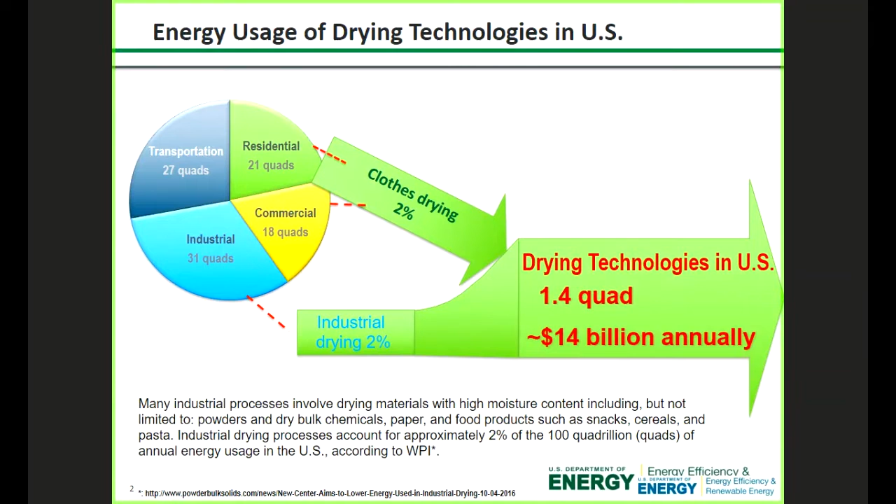Specifically on the clothes dryers, mainly because our project was focused on the clothes drying applications, but the IP that we developed can be applied on different drying technologies. Let's focus on the clothes drying in the residential buildings. Almost 85% of American homes have clothes dryers, and that accounts for 6% of the utility bills in residential buildings, and that's a large number.

Somewhere about $9 billion of energy bills goes just to the laundry or just to the clothes dryers, and that's a huge number. It's expected that the average sale of clothes dryers in the United States keeps growing with the rate of 1.8% in the next few years.

The conventional clothes dryers work based on the evaporation of water, or based on heating. What they do is that they take electricity from the wall outlet. They have a resistive heating element. As air passes across that resistive heating element, it heats up, and the hot air passes across wet fabric and evaporates water, and that's how they achieve drying.

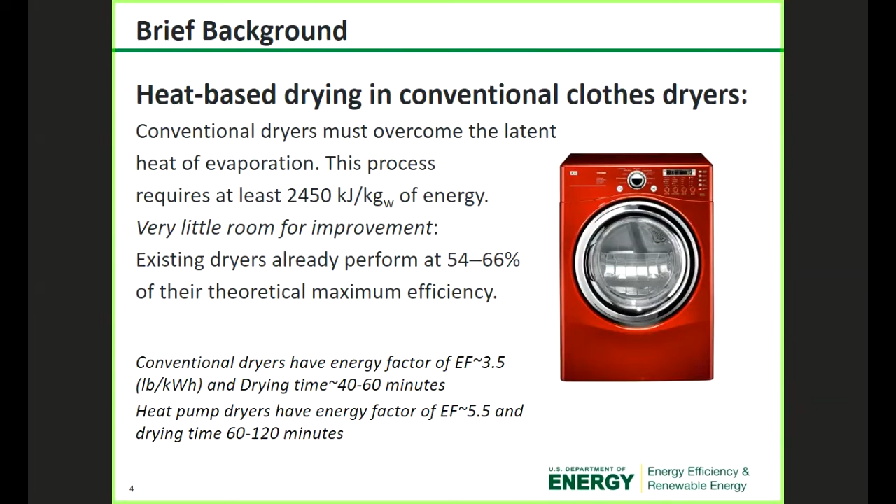So what we developed here, or what we proposed, was that conventional dryers use heat to evaporate water, and the latent heat of evaporation of water is so huge. So instead of doing that, we propose to use high frequency vibration to shake fabric at high frequency. And when you are shaking fabric at such a high frequency, actually moisture comes out of the fabric in the form of cold mist. So we are not evaporating water, we are just mechanically extracting the moisture from the fabric.

How we achieve high frequency vibration is using piezoelectric transducers. Also, some people call them ultrasonic transducers, and that's how we generate high frequency vibration.

Let's dive a little bit into the details. Let's say we have an oscillating system that has oscillation like A sin(ωt), where ω is the frequency of the oscillation. The driving force that tries to take the moisture out of the fabric is proportional to the mass of the droplets inside of the pores of the fabric times the acceleration that is induced by piezoelectric transducers.

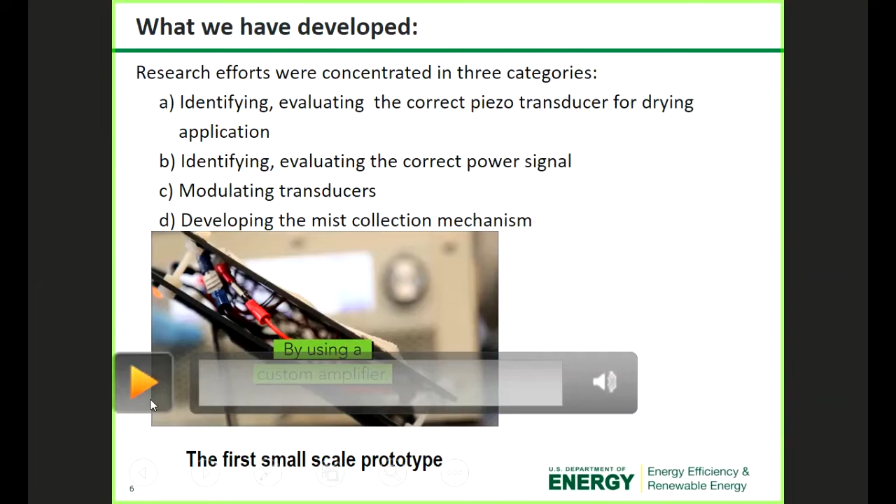So at the end of year one, this was a prototype that we had, which could dry 14 square inches of fabric. As you can see, the moisture could easily be removed from that wet fabric sitting on the piezoelectric transducers. The goal of the project at the end of year one was to dry at least 4 square inches of fabric in less than 20 minutes. What we achieved is that we could dry 14 square inches of fabric in 7.5 minutes. Also, we could modulate the system. The systems that you can see here consist of 24 transducers.

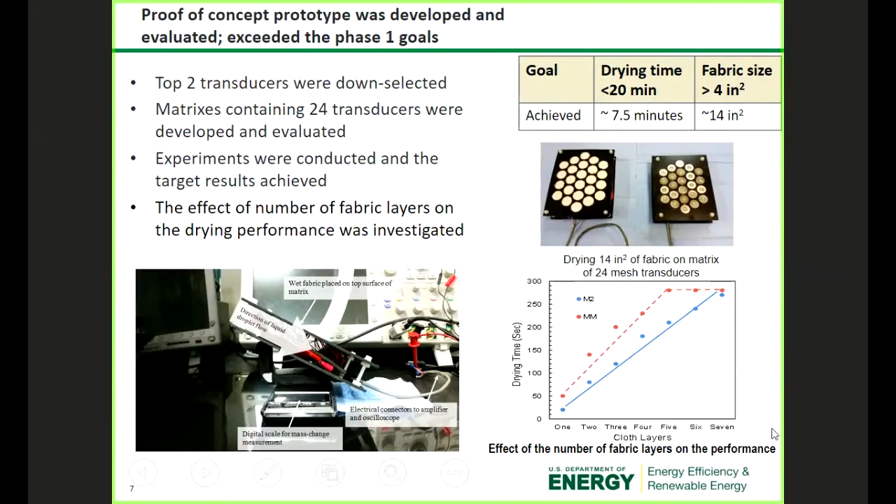We also did a study on the effect of the number of fabric layers. As you can see here, we showed that as you put several layers of fabric on top of these piezoelectric transducers, the drying time linearly increases as you put more and more layers. So after that point, something nice happened to the project. We developed a first order model for the system, and our model inspired a game-changing insight.

So during that time, which is in microseconds, we realized that we don't need to power the piezoelectric transducers. It's not necessary because they are not coupled together. So what we came up with from this analysis was: why not drive these piezoelectric transducers at a much lower duty cycle and save a lot of energy?

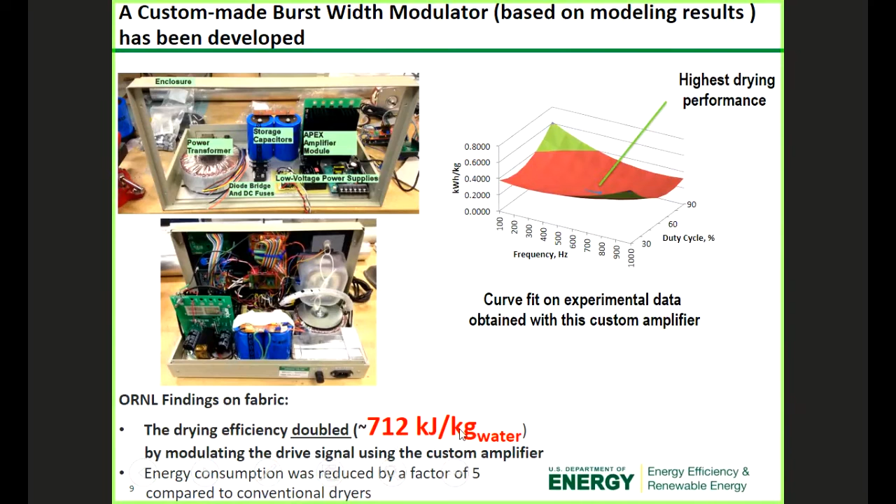We did that. In order to do that, we had to design our custom amplifier, and by doing it, we could double the efficiency of the drying and achieve drying performance as low as 712 kilojoules per kilogram of water removed. Putting it in perspective, this is about 5 times more efficient than if you wanted to evaporate water.

Another question was that this technology generates a lot of mist; it mechanically extracts the water in the form of cold mist. What can be done with that cold mist? So in a part of this research, we focused on how we can design a mist collection mechanism, and we realized that by putting a few layers of typical lint filter and passing the mist across that, we can collect the water, and the water can be drained easily. That's one way.

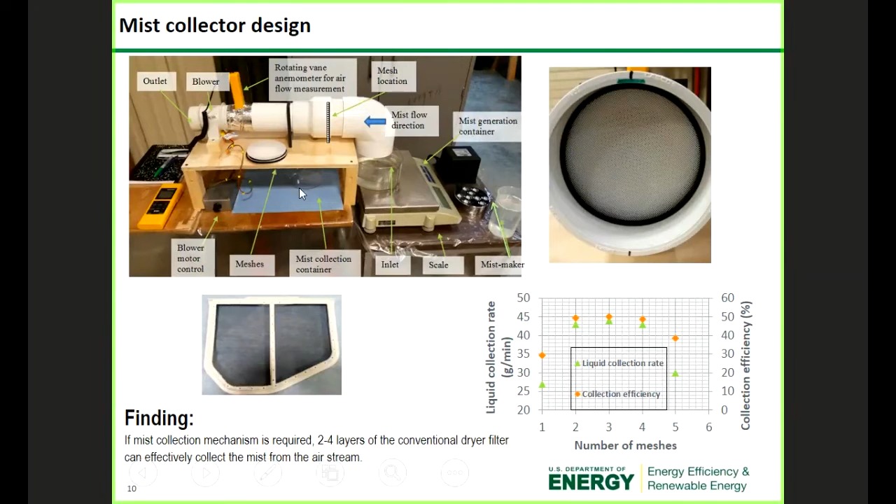Or if there is any venting system available, you can just simply vent it out. So in either case, the final design of the clothes dryer can be either a vented dryer, or the water can be collected inside of the dryer machine itself. So there are a lot of flexibilities in this area as well.

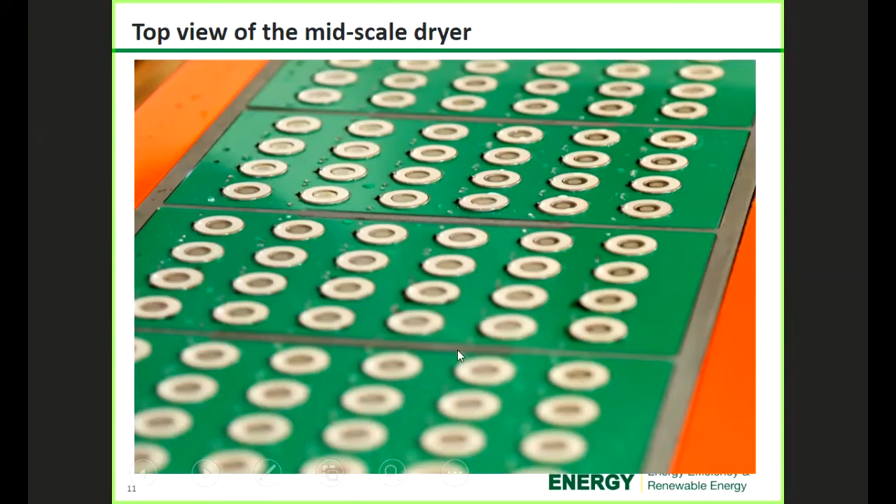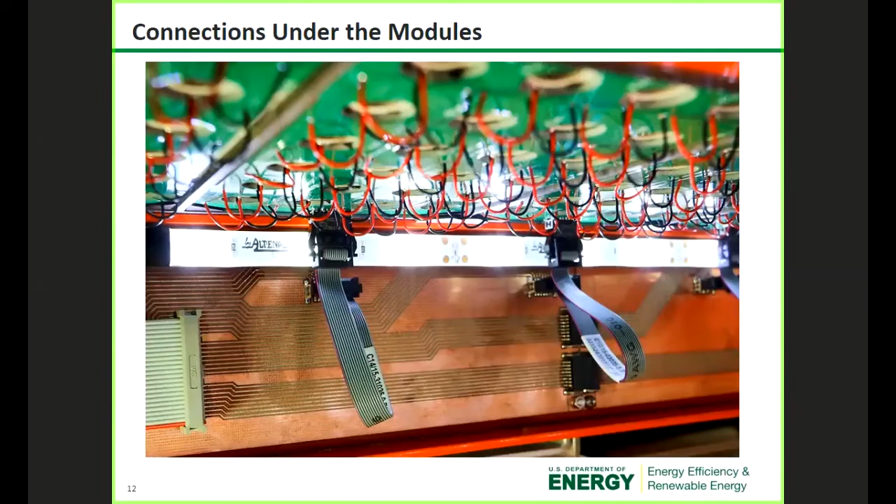And this is the prototype, the latest prototype in action, and I'm gonna run the video for you. So what you are seeing here is that we put a wet fabric on top of the piezoelectric modules we had. You could close the lid or not, it doesn't matter. And as we were increasing the voltage or amplitude of the vibration, you can see a lot of cold mist is coming out of that wet fabric.

The interesting thing in this technology is that this cold mist is not warm at all. It is just as cold as room temperature, and that's why we could reach such a high drying efficiency. So this process goes on for somewhere about 4 or 5 minutes, and we could reach complete drying in 4 or 5 minutes.

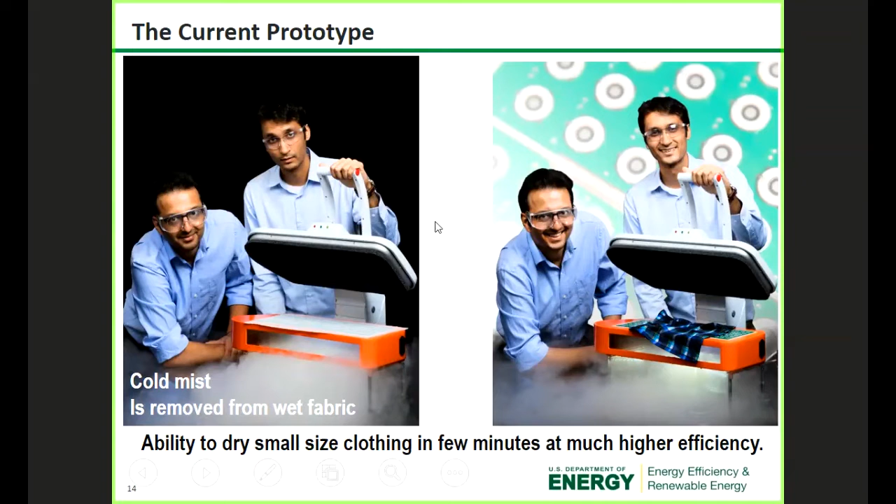So the prototype that you saw has the ability to dry small size clothing in a few minutes at much higher efficiency. As a matter of fact, we put a small pant, actually that is the pant from my 2-year-old son, and we could actually dry small pieces of clothing. So this is the largest prototype we have so far, but we are working on scaling it up.

So let's look at some efficiency results of this prototype. The x-axis here is the remaining moisture content of different configurations. We always start with 57% initial moisture content, mainly because when the clothing comes out of the washing machine, it usually has 57% moisture content, and we dry it down to, in most cases, 20% remaining moisture content.

What we realize is that below 20%, the efficiency of drying through this method is not very good. So probably this technology works best for moisture content above 20% and even above 57%. So it can dry anything from high moisture content down to 20% very efficiently.

So the y-axis here is joules per gram of water removal that we put on the piezoelectric transducers, and we put two lines. One line is the energy needed to evaporate water, 2400 kilojoules per kilogram of water removal, and another green line here is the typical resistive heating based conventional dryer efficiency range. So anything below these two numbers is better than an evaporating dryer and shows better performance than the conventional system.

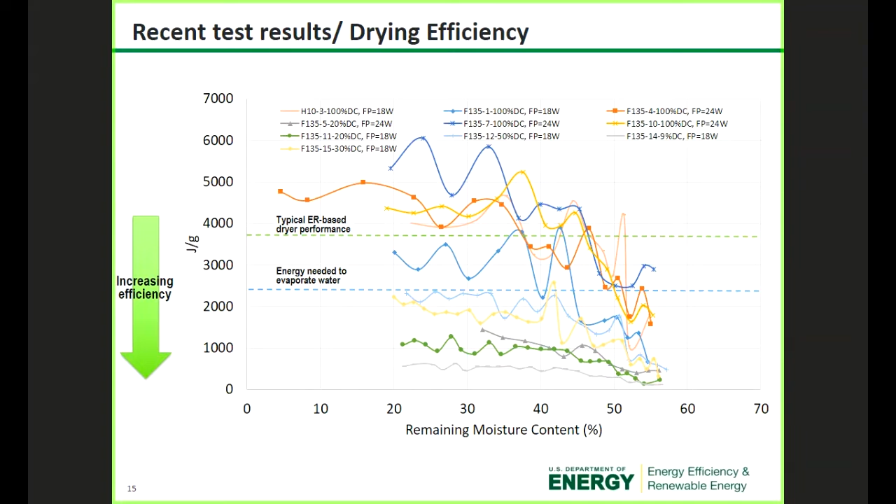And as you can see, in most of the configurations that we ran, the energy consumption is significantly lower than evaporative drying. That means the efficiency of the drying is much better than conventional evaporation-based drying.

This slide shows the drying time versus remaining moisture content for the same test. For most of the cases, the drying time versus remaining moisture content was following almost a straight line. In some cases it was faster. In some cases, it was slower.

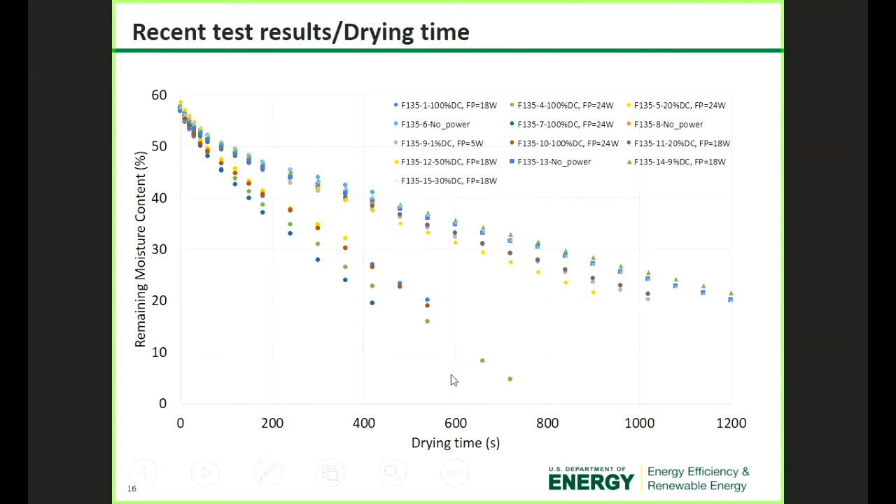And this table summarizes the results we got. The best results we got so far show that the efficiency of our drying could be as high as 16 or even 18 pounds per kilowatt hour of energy input to the system. And to put it in perspective, conventional dryers have an energy factor of about 3.5, so this is a significant improvement over conventional dryers.

Definitely, we don't have a full-scale system, so there are a lot of other components that need to be added to the scaled-up system. But definitely, this shows a promising result so far, showing that we can actually dry much more efficiently than evaporating water.

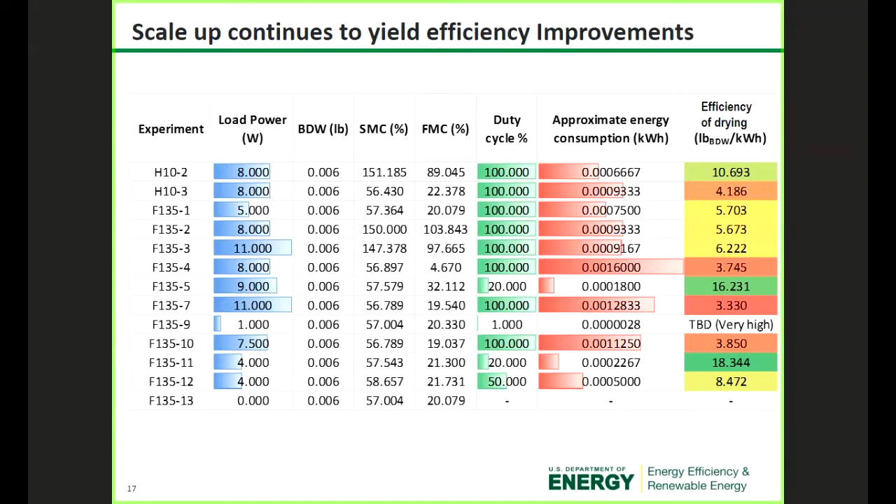So at this point, we are at the end of year 2 of the project. When we started the project, with the first prototype we could dry 1 square inch of fabric, but at this point we can dry somewhere about 300 or 400 square inches of fabric with our prototype.

And from an efficiency point of view, we started with an energy factor of somewhere about 3 or 4, and at this point our energy factors are beyond 12 or 15, as you saw in the previous table. So we significantly improved both the efficiency and the scale of the system in the last 2 years.

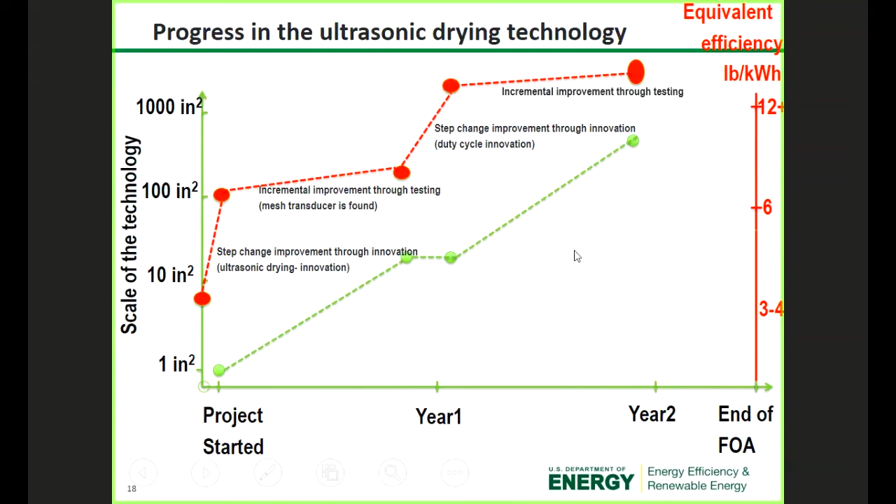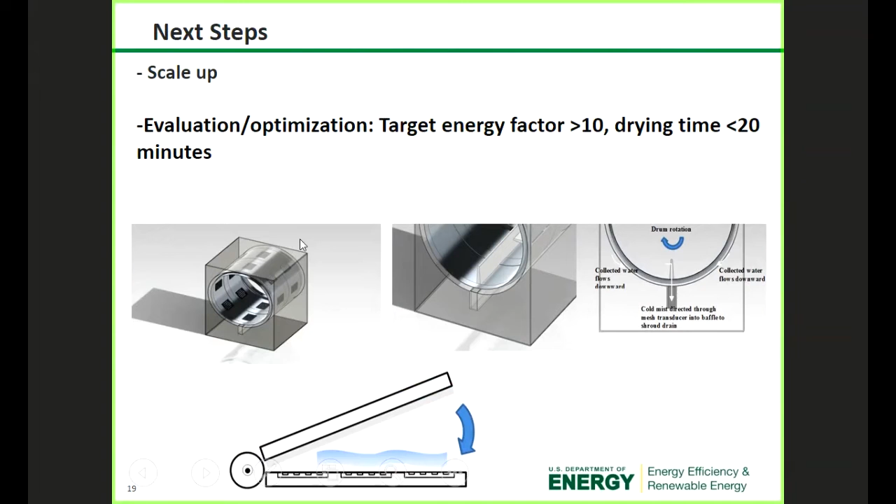And the next step would be we further scale up the system, and probably we are going to retrofit the full-scale dryer drum with the piezoelectric transducers, and also design some alternative systems for the full-scale dryer other than the conventional full-scale drum dryer. And also we have to show that we are going to achieve the energy factor more than 10 and drying time of less than 20 minutes in the scale of the system, and that's our target.

So some frequently asked questions. We have demonstrated this technology to many groups, and they come back with so many questions, and I summarized a few of those questions here, and I am trying to answer them as briefly as possible. One of the questions is what happens with the mist after it is produced. So as I described in this presentation, it will be either vented out of the building or can be collected with the mist collection mechanism that we designed under this project.

Another question is, who is the owner of the IP on this technology? The answer is that ORNL is the owner of the IP, and actually the IP only belongs to Oak Ridge National Lab and not the other entities. Can the technology dry material other than fabric? The answer is that it depends. We would like you to contact us if you have any specific applications, and we can help you to figure out whether this technology can be applied to your system or not.

But in summary, what we have done so far, our main focus was on fabric drying. And we showed the technology showed a great potential in that area. We also put a little bit of time and showed that the technology can be applied for paper drying and also cellulose drying. We have done a few tests on small rubber pellet pieces. That was not successful. So what I'm saying is that it depends on the application. So we would like you to contact us and figure out whether it is applicable or not.

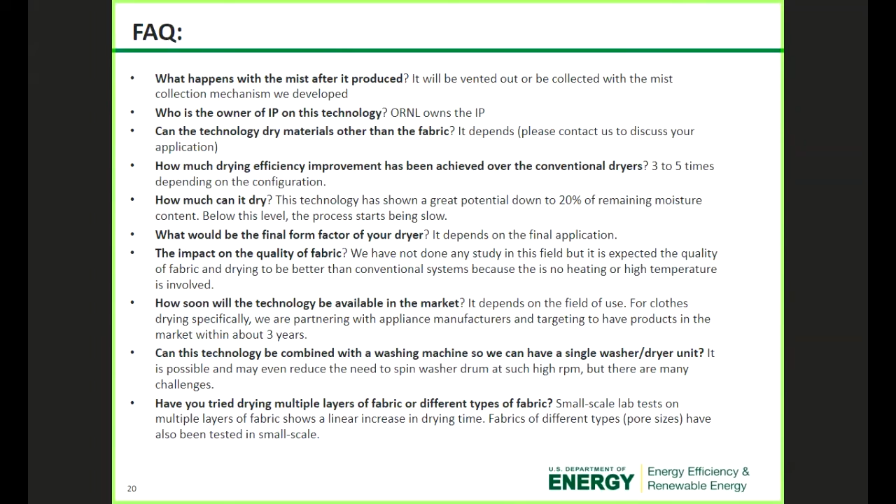Have you tried drying multiple layers of fabric or different types of fabric? So the answer is that on this small-scale system, we dried multiple layers of the fabric, up to 9 layers, as you saw in my presentation, and also we worked on probably four different standard fabrics. And yes, the technology works for different types of fabric. What we haven't done so far is to dry much thicker fabric like jeans, and that's one thing that we are gonna study in the next phase of the project.